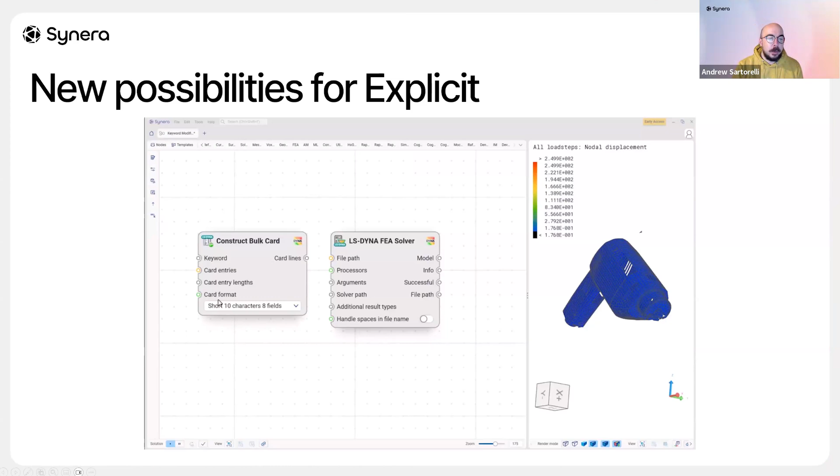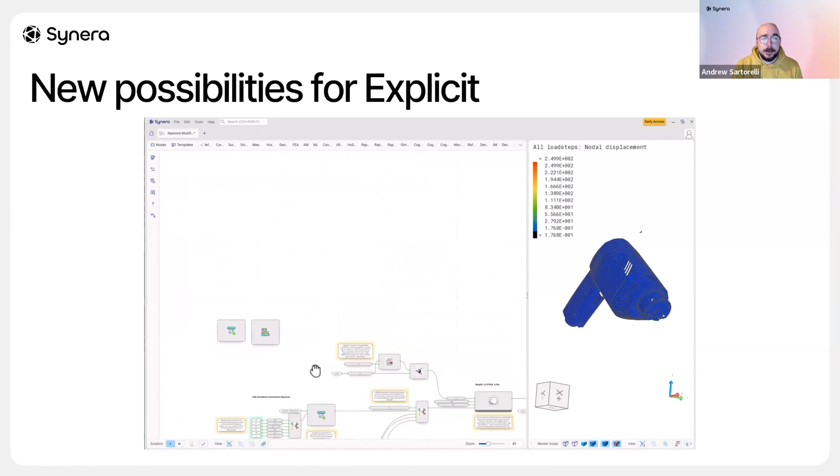Starting with the new release today, we actually have the ability to start to create explicit dynamic analyses inside Synera for LS-DYNA. For that, we've created a few new cards. To be clear, this is a very long-term project for us with a lot of work still going into it. But today you'll be able to achieve the ability to do things like drop tests.

So we can see here actually visualizing the results from an LS-DYNA analysis. You can see the deleted elements removed from the results presentation here. And now let's take a look at what it actually takes to construct this.

So my colleague Jess went in and he wanted to actually modify an existing drop test. And to do that, he had to change out a few different cards. He was going to change out the initial velocity, a few body loads, even the curve defining the drop itself.

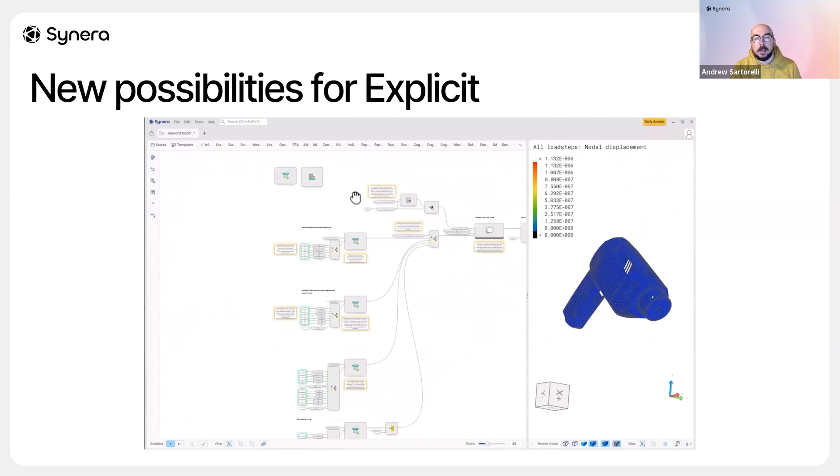So now with this new Construct Bulk Card for LS-DYNA, you're able to construct those cards and then very easily, using text-based manipulations, inject them back into your analysis. We now have an LS-DYNA FEA solver node that takes a file path. So you can use this text-based input deck, run it on your machine, maybe run it on a cluster using the SSH nodes, and then visualize the results there.

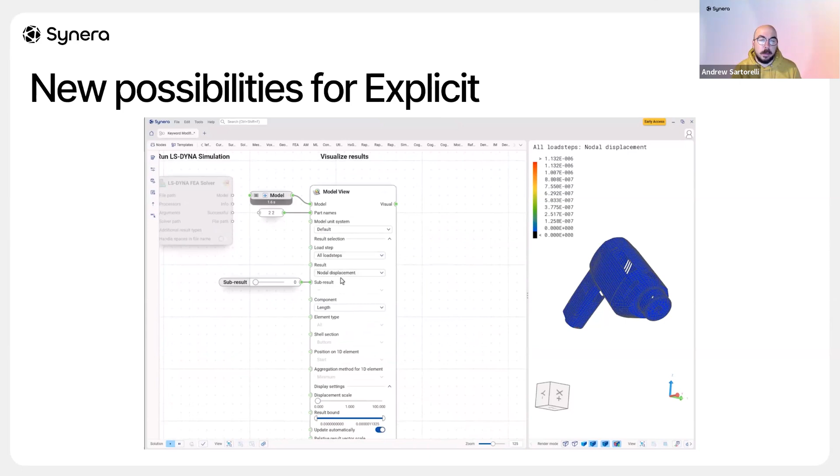So initially, early on in this first release, we're targeting things like drop tests or modifying existing analyses that you may already have, or you just want to change a few parameters, maybe a material card. And so to do that, we've added a few new nodes.

So to start out with, we have the new LS-DYNA FEA solver node, again, that takes a file path, so you can plug in a text-based .k file there to run with the solver, and you'll get the model results back into Synera. We've also added the file path for the Abaqus FEA solver node as well, so you'll actually be able to construct your own Abaqus explicit analyses and bring those results back into Synera as well.

For the solver node, we've added a new import LS-DYNA model node, which allows you to import your LS-DYNA results, your d3plot results. The nice thing here too is if you have an Abaqus explicit analysis set up, we allow you to bring in the results without needing an input deck, so you can directly read in Abaqus explicit results. We're also supporting Altair Radioss, so if you have an H3D file coming from Radioss, you can import that right into your Synera workflow.

To allow you to really precisely interact with your LS-DYNA input decks, we've added two new cards. You're familiar from the past release with our construct bulk data card for Nastran, OptiStruct, and other solvers, which lets you easily construct bulk data cards to put into your input deck. Now we're adding the find LS-DYNA card, which lets you easily read through your input deck, find a specific card you want to replace, capture the start and end indices of that card, and then replace it. This is great if you want to find a certain load or a material - you can search through your input deck very easily and replace those.

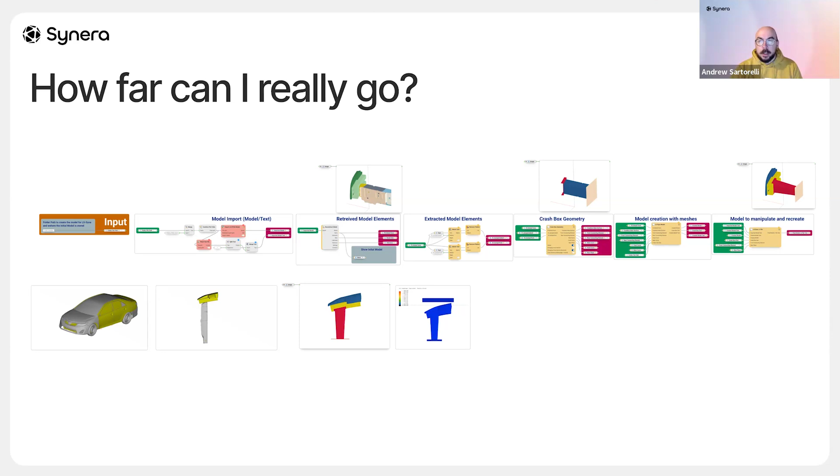That's great for some basic workflows, but the question is how far can you really go with what we've created today? I want to call out our friend Leopold, who went through and made a very detailed analysis to show what, if you're a really advanced user, you can do with the new nodes. We actually constructed an analysis of a crash box inside Synera, the entire workflow using some of these new solver nodes. So not a full vehicle simulation, but subcomponent assembly analysis is definitely possible now with Synera.

So we can see here the results of this. The nice thing is you can start to couple the design capabilities of Synera, maybe to do a design study on that cross-section of the structure in your crash box to optimize there. So incredibly excited with what we've done so far today with explicit analysis inside Synera.

A lot more to come in our next release early next year - the team is hard at work already on some of those new capabilities. But coming in Legendary Loki, we'll have the new solver node, the ability to read in results and interrogate results for those explicit result types, and then the ability to easily insert any card into your LS-DYNA deck.

Of course, when we talk about getting results from workflows, it's not just explicit - we still have a lot going on in the world of nonlinear implicit analysis, and we're continuing our progress there. Last release, we added our first ability for contact for solvers outside OptiStruct. This release, based on customer requests, we added even further capabilities for Abaqus Standard, and we've also added the ability to have contact with our own internal solver. We still have three more solvers to go on our roadmap - in our first release in 2025, expect to see MSC Nastran, ANSYS Mechanical, and Simcenter Nastran.

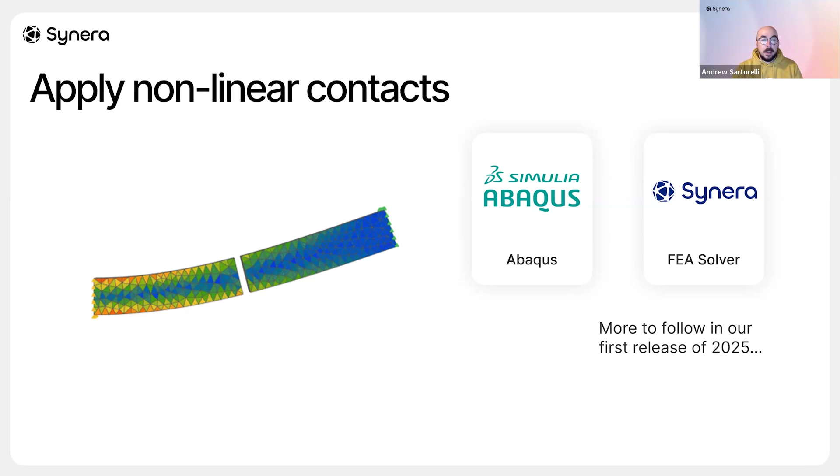But let's take a look at what you can do today inside Synera. Here we have a gap between two components - a very simple analysis to demonstrate that we now have the ability to do a kind of tied contact between our parts in our analyses, whether we're using OptiStruct, Abaqus, or now the Synera FEA solver as well. Really excited to see what folks end up creating here.

Again, we continue to extend these nonlinear capabilities for our solvers. This release, we're adding elastoplastic materials for Abaqus Standard - the ability to import your stress strain curves, your work hardening data, for nonlinear analyses, especially when you're working with metallic materials. This is going to be really useful to help you get the most out of your analysis here.

The other thing we've started to do is introduce persistent indexing for loads, boundary conditions, materials, and sets. You may say this sounds like something not really exciting, but we find having this indexing is really going to help if you want to go in and update cards manually, perhaps just to swap out some information. This index will help you very easily find a specific load, boundary condition, or material inside your existing input deck. We're starting in Legendary Loki only with the OptiStruct solver, and hopefully in our upcoming release we'll add support for further solvers as well.

The other thing that's really exciting is we're adding more pre-processing capabilities, so you can actually take your geometry and make it more simulation ready. The nice thing about Synera is we have the Parasolid geometry kernel under the hood, and we're giving you more capabilities to do operations that make setting up FEA analyses extremely tedious in existing tools.

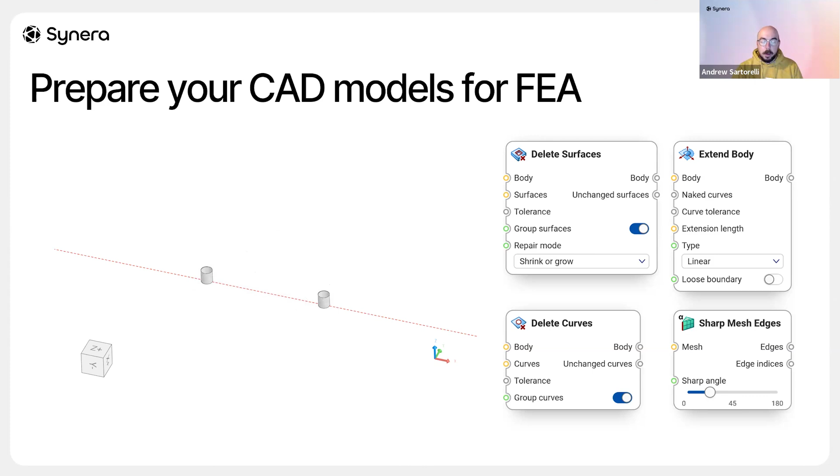Imagine we can now select some surfaces that we want to delete from our model. Using the delete surface node, we can very easily end up with a simplified model by removing some of those surfaces. I think quite a few of you watching actually do a lot of defeaturing operations with Synera, removing small holes, eliminating gaps.

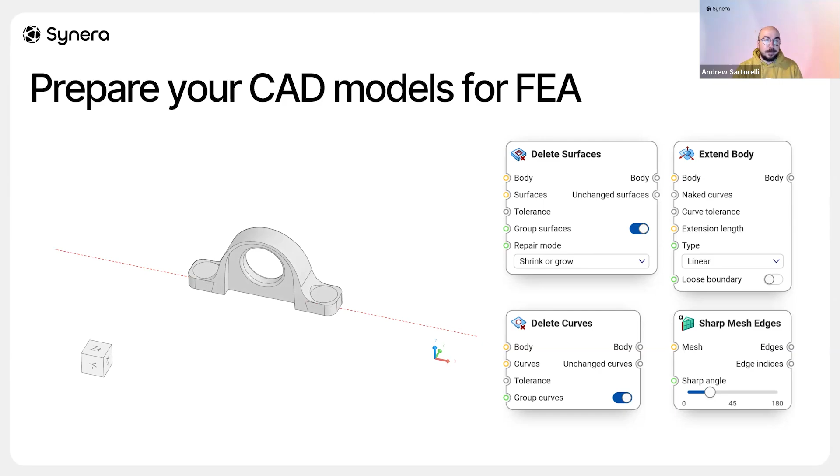So, to recap what we've done on the implicit FEA side: we've added more nonlinear materials for Abaqus Standard, started the introduction of persistent IDs for loads, boundary conditions, and materials to allow you to more easily swap out data in your deck for text-based manipulation, added more contacts in this release with more planned next release, and a nice set of capabilities to eliminate manual work in pre-processing your models for simulation.

So these were some of the big topics we worked on, but there's a lot of other features too. Daniel mentioned 99 features going into this release. I think everyone wanted one more to hit that 100 mark, but I'm sure the next release will have even more fun features. So we put these all into improvement categories.

On the product management team, we get a lot of feature ideas. I can tell you we read all of them. We can't do every single one, but we've added a few that I think will really satisfy quite a few people on the call today.

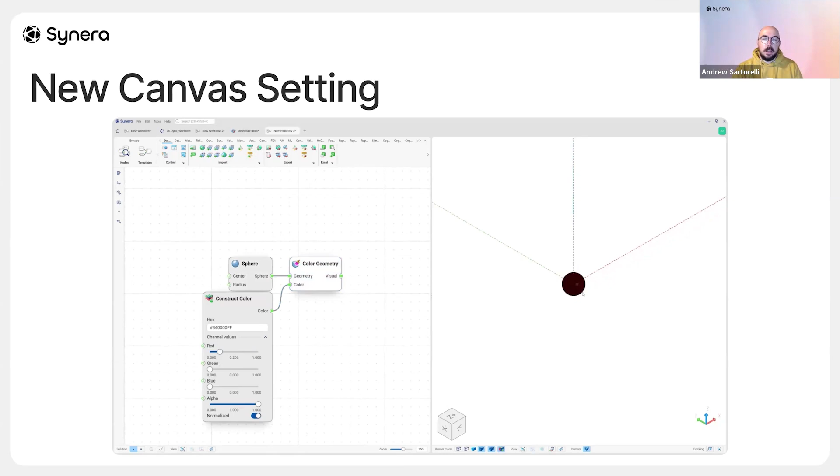So today when you operate inside Synera, you create a sphere, it's visualized. You go in, you want to color that geometry, you construct your color. When we visualize that, we're seeing all of these things come up on the screen at once. We have to turn on and off nodes to visualize the right thing, and this can be a real burden if you're creating really large workflows.

So now we've added a new setting. If you go under Canvas tools, or tools settings, and then the Canvas section, there's a default node visibility option that will be turned on to visible by default, but you can turn that to not visible. What will happen now is when you work inside your model, as you add new nodes to the canvas, the visibility will be turned off by default.

It sounds trivial, but for quite a few of you, this was taking a bit of time to go in and manually turn off each one of these nodes. So I'm sure for you power users out there, this is really going to help speed up some of your workflows.

We've added the ability to start creating zip archive files directly inside Synera, so you'll be able to zip and unzip data. This is nice if you're generating a large batch of images for your report - you can simply zip that together and reduce the file size, or maybe you want to use some zip data inside your analysis workflow.

Another pain point was people having to manually modify the file path to end up with a directory path, so we've made that a bit easier now. You'll have simply two new containers, one for relative directory path and one for directory path, which can plug into some of your favorite nodes you're already using today, hopefully eliminating some tedious work in constructing Synera workflows.

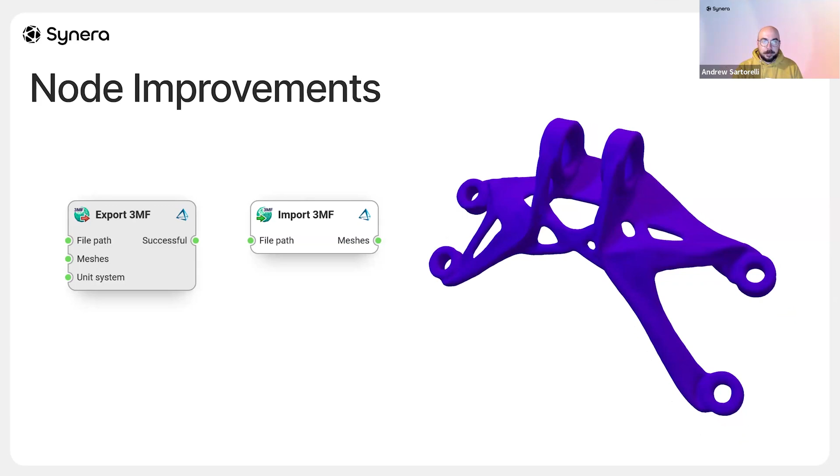We've added a new option for the FEA solver that allows you to create a separate process for it. Sometimes it was a bit more difficult to cancel the process as it was long running. You now have the option to spawn a separate process, giving you more cancelability. We've also gone into some of our filtering operations for FEA, which were very long running, and added more checkpoints to allow for cancellation, giving you better control of your workflow in certain instances.

A few more customer requests here. We've added find regex inputs on replace text. Merging dictionaries now has a recursive operation. And for those of you using dynamic controls, we've added a dictionary output as well, so when you construct that dynamic control, you can actually get out exactly what you put in.

Of course, plenty of other additional features and capabilities are going into the new release. But let's talk about some of our marketplace updates, an area near and dear to my heart.

From our last release to this release, we've added 6 new add-ins to the marketplace. We added the NavPack connector from Navasto, great for those of you looking to do AI machine learning on simulation results. Arc Engineering has released quite a few new add-ins: the Facton connector for those looking to do costing workflows, an additional optimization algorithm, and their toolbox of tips and tricks for creating more performant Synera workflows, the Arc toolbox. And of course, as I mentioned before, we've really released, for the first time, the LS-DYNA connector with a full set of capabilities from Synera.

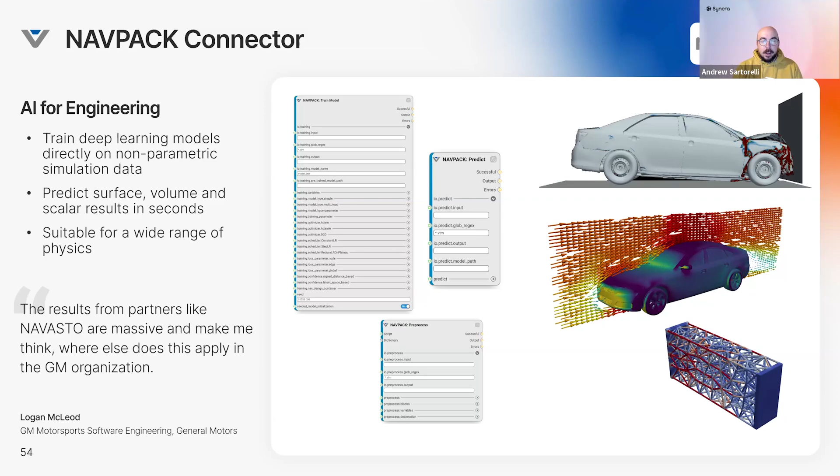Thanks, Andrew. It's really a goosebumps moment when I'm watching what you and your teams have achieved over the last couple of months.

So, to wrap it up, what have we seen today? We saw the new release 24.11, Legendary Loki, with a bunch of new features. Synera Run makes a giant leap into enterprises now, covering long-running tasks but also giving you the full permission schema to really roll it out inside your organization. And a lot of new nodes, especially in the field of simulation, implicit and explicit. We saw some new improved nodes and massive updates on the marketplace, and we are really keen to get your hands on it and get your feedback.

And the question is, when will it be released? I can tell you, the team made it again, so it is available today. We just made the download accessible for you. So go, as a good call to action, to portal.synera.io, download the newest version, Legendary Loki, get your hands on it, and give us feedback. I hope you will enjoy the new release as much as we did during the last months testing it very heavily for you guys.